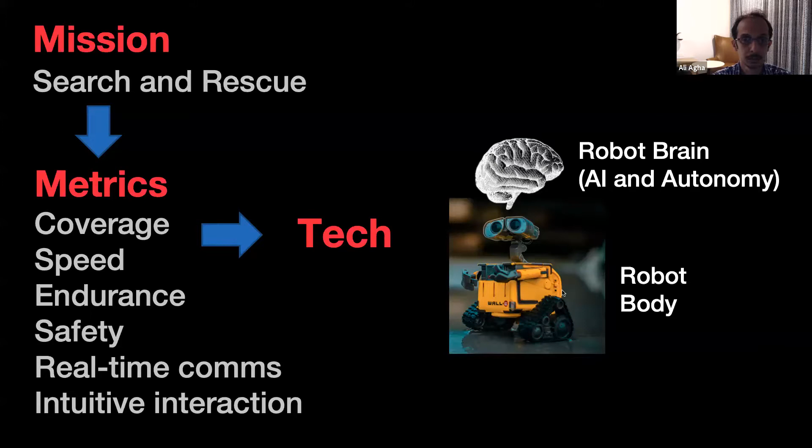In part one, I'll briefly go over one example mission as context for the technologies I'm going to talk about. And in part two, I'll touch very briefly on some pillars and components of robotic AI that would be most related to search and rescue missions.

As a reference mission, I'm focusing on the DARPA Subterranean Challenge, a huge project and effort started in the US 4 years ago with participants from all over the world. The goal of this robotic event, held as a competition, is to autonomously explore unknown environments, as the ones you can see here—pretty challenging environments like man-made mines and tunnels after disasters, abandoned urban structures that we need to search and explore and gather information from, natural caves, and environments that combine all these features together.

A feature of these environments is that they're GPS denied, communication is really difficult, and mobility-wise it's difficult to explore them. But even further, operationally they introduce more challenges. We need to cover multiple kilometers in only 1 hour with no prior map of the environment, and with no human allowed to enter the course in this competition. There's only one single external supervisor who can see the data coming from robots, if any data comes through when communication is established.

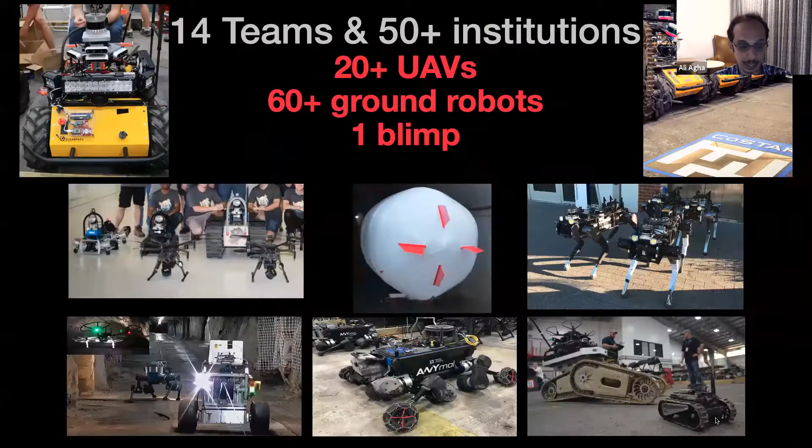There have been more than 50 institutions participating in this effort over the last 4 years. This has been a really amazing push for technology towards search and rescue. Of course, the effort is still simpler than a real world disaster robotics scenario, but it's a first step, a great step towards that.

There have been more than 20 different UAVs deployed in this effort so far, more than 60 different ground robots - legged, wheeled, tracked, and so on - and even one blimp has been deployed. This gives really a plethora of technologies to study and see what works, what doesn't work, and how we can combine these to push the envelope forward.

Our team is called CoStar, a collaboration between NASA's JPL, Caltech, MIT, KAIST, Lulea, as well as a lot of industry partners. We have been able to do well in the last competition and won the latest competition so far, which was in urban search and rescue back in February 2020.

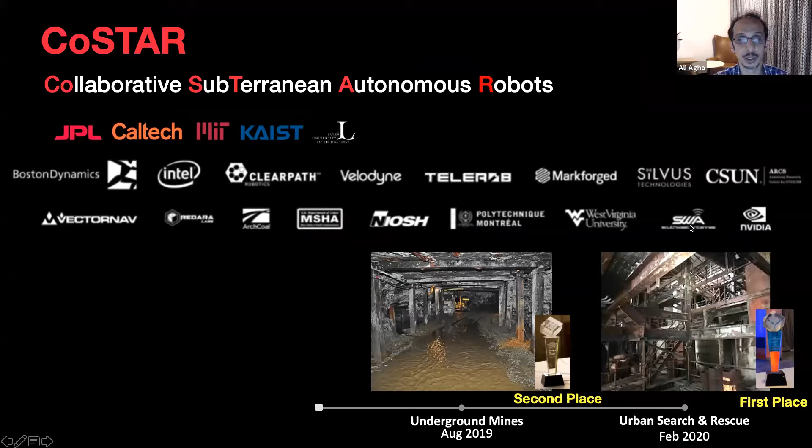Our concept of operation relies on multiple robots with heterogeneous capabilities. So we have legged robots, wheeled drones, tracked robots, where each one is dispatched to part of the environment autonomously. They try to understand what is needed locomotion-wise, AI-wise, and dispatch themselves to be able to explore and maximize the coverage in the limited amount of time that we have.

You see pictures of some of the robots we have deployed. As I mentioned, these complementary capabilities get dispatched to different parts of the course, closer to the base station where the robots are being launched. We try to drop communication nodes like breadcrumbs to create a wireless mesh network to maximize the bandwidth and the ability to talk to the surface.

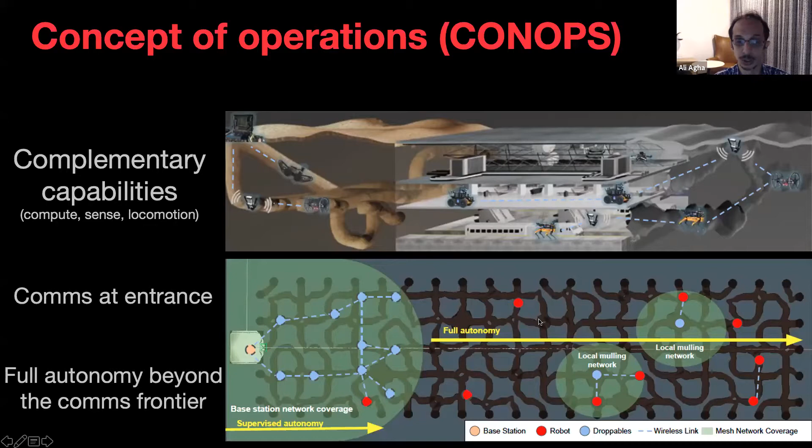But after a while, as you see here beyond the shaded green, the robots are fully autonomous on their own, exploring the environment and coming back to the surface to return the data they're gathering.

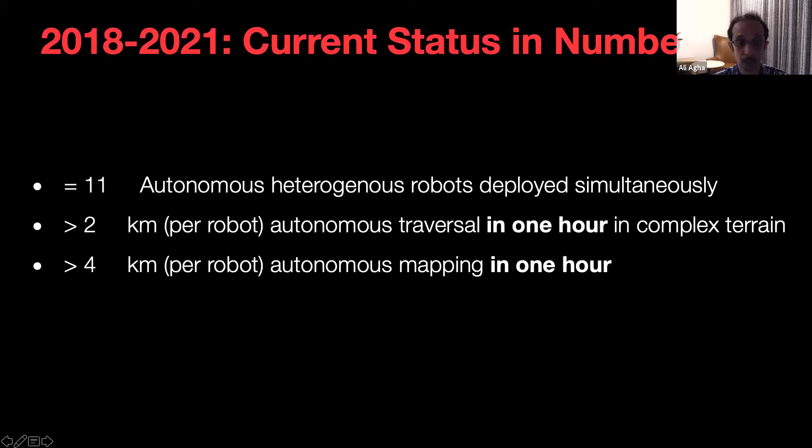Just in terms of numbers, to give you a sense of the progress of our team, we started back in 2018 with 1 or 2 robots, a very minimal exploration capability of 200 to 300 meters. But over the course of 2-3 years, in our latest operations we have been able to deploy 11 heterogeneous robots simultaneously, autonomously exploring the environment. Per robot, the system is able to explore more than 2 kilometers in 1 hour over complex terrains and map more than 4 kilometers.

So I did talk a little bit about the mission. In the next few minutes, I will touch very briefly on some of the technologies that are basically the pillars under these behaviors I talked about. If there's interest, please reach out to me offline and we can go deeper into these technologies, because there's not enough time at this point to cover those. But I'll go over each one briefly, touching on each for 30 seconds or so.

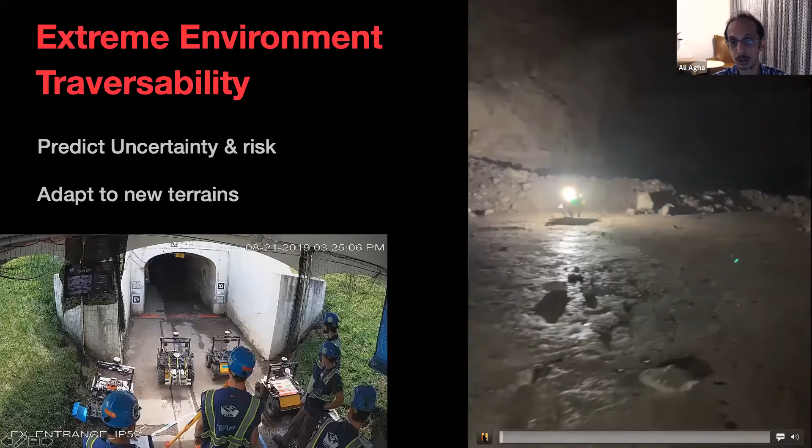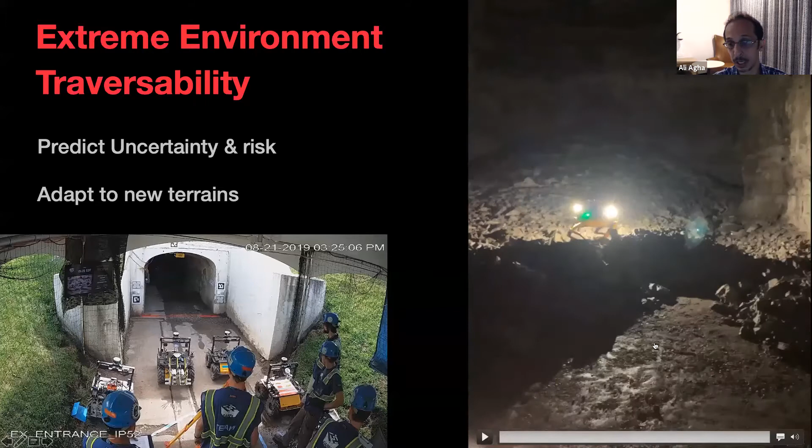The first technology I want to touch on is traversability. We have been working a lot on traversability efforts. Here on the right, you see a mine where we have a collapsed part, and the robot goes and starts basically evaluating what trajectories it can take to explore this part and search for signs of survivors, like CO gas, or thermal, and so on, under the rocks. This has been a big part of our efforts to evaluate where it's traversable, where it's not, and make sure the robot can handle these sorts of environments in this level of extreme cases.

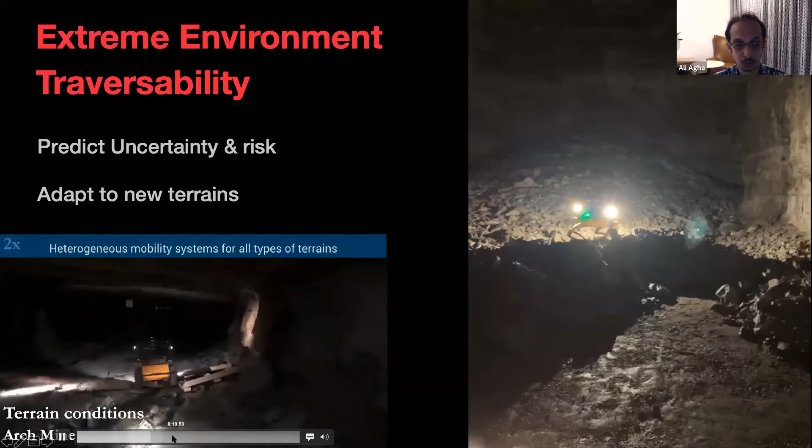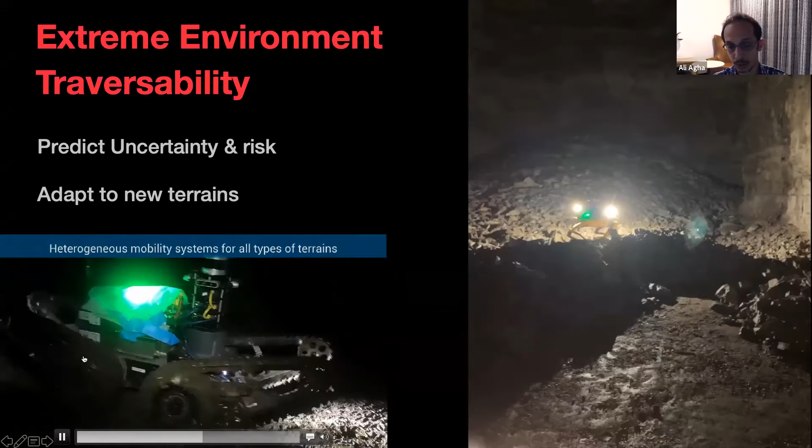On the right, you see a similar effort on the ground robot, wheeled robots, 900 feet underground in a coal mine, where the robot is trying to explore really extreme environments. When a wheeled robot is not able to do so, as you see, it stops here. It autonomously dispatches the tracked robot to traverse certain parts of the course, or if there are elements that need a legged platform, the system sends a legged platform to explore those.

The second technology is navigation, where we are trying to handle GPS-denied, variable lighting, dust, fog, and smoke.

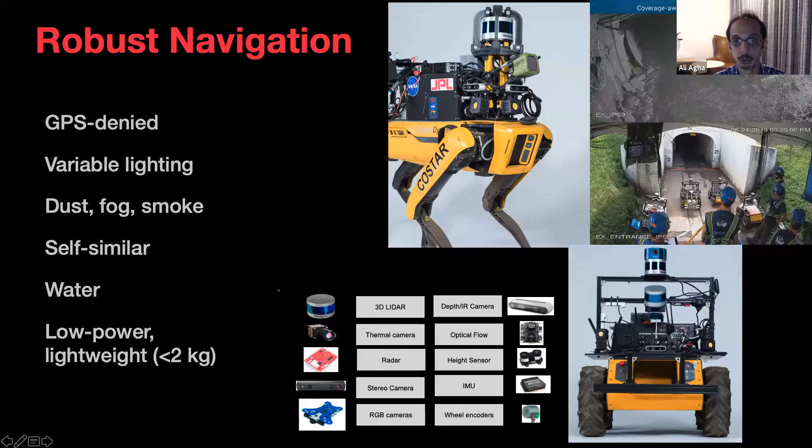As you see, we have a lot of different sensors that we combine to handle different parts of the course. I'll move on. The next technology is on mapping, where we are trying to create large maps to pinpoint the findings in the environment and inform the operators where the events are happening.

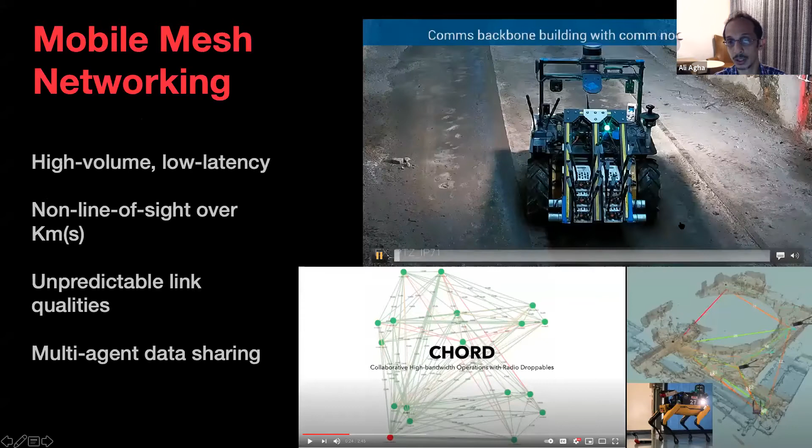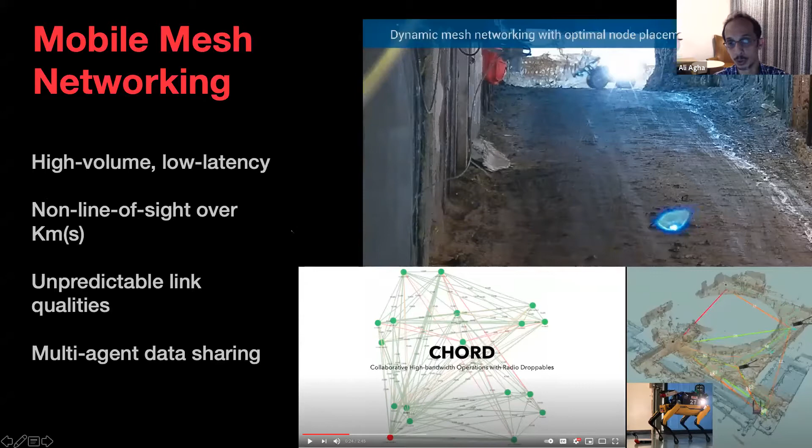Communication between robots is a key aspect to send the data. As you see here, we are showing how we drop communication nodes in the environment to create the wireless mesh network, and sometimes robots act as mobile nodes so we could act like repeaters, still being able to talk to the robots that are deeper in the environment with maximum bandwidth possible.

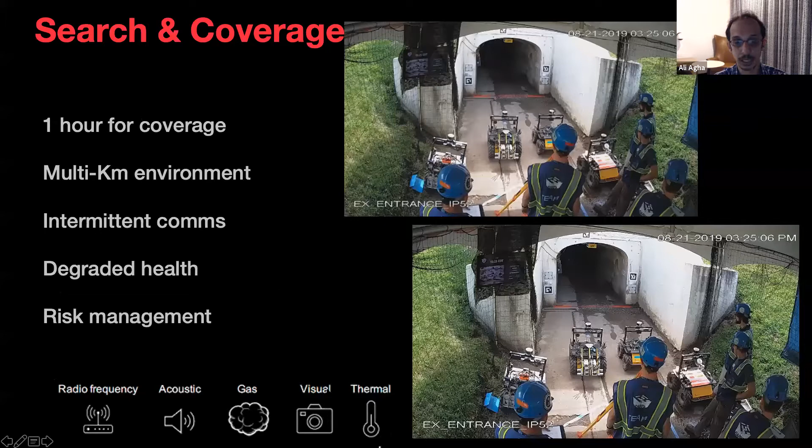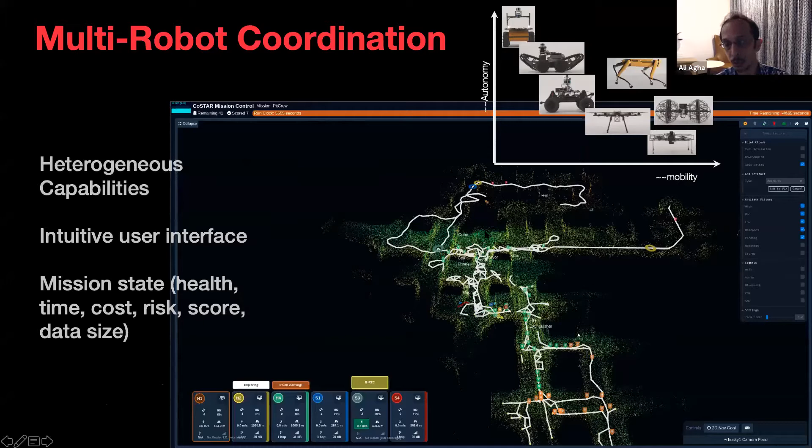Coverage, of course, is an important part where we search for the artifacts I talked about on the bottom left. So I'll skip this slide and move on to the intuitive user interface, where we check the health of the system, and the operation team is able to see where each robot is, what the health is, and how the mission is progressing at the moment.

So with that, this is a very brief touch on this particular mission, which is a step again towards pushing the technologies on search and rescue forward.

And with that, I'll briefly conclude and summarize the main points of the talk. One is that when we analyze robotics-related technologies for search and rescue, it's important to look at robot brain and robot body in harmony and together, to understand what the state of practice and state of the art is.

Assisted AI and autonomy can help a lot. For each given robot body, having better AI and autonomy will open a lot of opportunities on how we use these systems. New investments, recent investments from different sectors, commercial and government, have been pushing the envelope on this front and are a step towards increasing trust in putting these technologies forward.

And finally, under the hood of all we do, really the main element is the fact that we are trying to predict uncertainty and quantify the risk to be able to increase the trust in the system to be able to reliably deploy it. With that...

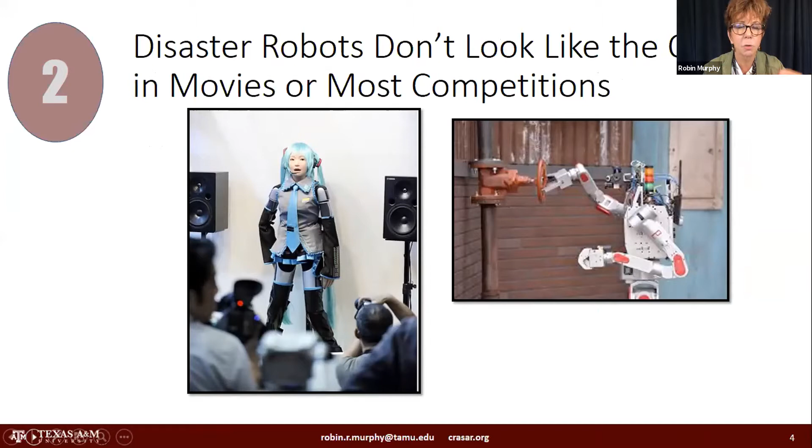Robots can be ground, aerial, or marine systems. The ground robots used today are typically very small. You see that snake robot used at the Mexico City earthquake, and an Inuktun, that category of small robot about the size of a shoebox, typically used at building collapses, from World Trade Center to the Surfside building collapse.

Likewise, these small, inexpensive aerial systems fit in backpacks and are easy to carry. And the same thing we see with the underwater and marine surface vehicles, robot boats. You see ROVs and kayak-based boats.

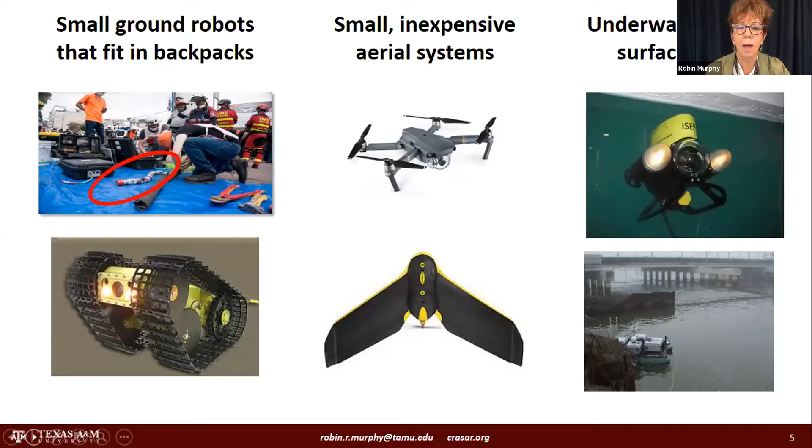The third thing I would like for you to remember is that robots have already been used for almost every disaster and every mission objective. A big thing about what we have found in our studies of innovation is that it's a demand pull, not an innovation push. The responders know what they need, and so it's a matter of getting it to them.

If you look, we've seen robots used extensively for the world's number one disaster, which is flooding. Earthquakes, tsunamis, wildfires, hurricanes, tornadoes, volcanic eruptions, nuclear accidents like Fukushima, major use, marine casualty events such as helping lifeguards with the Syrian refugees coming across to Greece, that's probably one you didn't think of. Building collapses, chemical spills, and pandemics.

Now let's think about that. Pandemics, that sounds weird, right, when we think of disasters, but we're thinking of this all-hazards approach. Emergency managers consider pandemics just one more type of disaster. In the first year, from the very first use of a robot for COVID, we saw 338 instances in 48 countries.

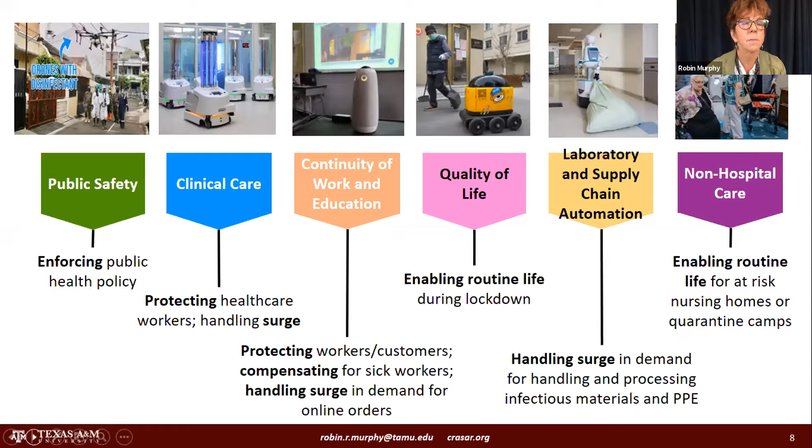So robots have been used for almost everything already, and that's not just for the immediate response, but for all phases. Before an incident happens, for instance like a flood, being able to map your land use, get that digital elevation work, monitor the rising waters of a flood, document your infrastructure, and identify your vulnerable businesses.

During a response, there's tactical, those life-saving operations, where it's literally helping the responders. You're not automating that, you're assisting them to see how to best get a boat in the water to get over to that house, to get that person off of it. Reopening ports and infrastructure was a big problem with the tsunami in Japan, it took out all of their bridges for their trains, and all of the ports, which you'd normally bring supplies in on, like you saw with the Haiti earthquake, you're bringing in the majority of your supplies on ships, but you can't tell if they're fixing to run aground.

Likewise, recovery, being able to get that comprehensive damage assessment, again to monitor what's going on and document those states.

So the fifth lesson, and I think this is really important, is that less developed countries can adopt this. It's not rocket science. Even though we've got brilliant researchers like JPL working on the next area, the majority of robots used in major disasters are $1,000 DJI Mavic Pro series, not the $40,000 ones with LiDAR. They're using structure from motion. Anything you can do with the $40,000 one, you can do with the $1,000 one, and you can carry it in a backpack. If you lose $1,000, that's fine.

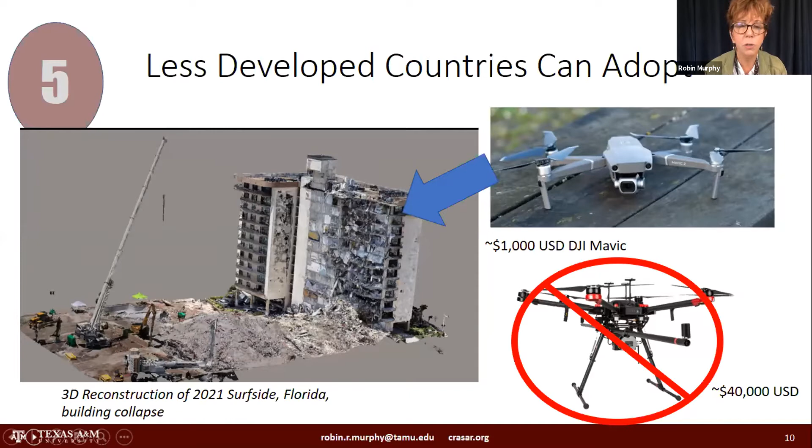So I said I'd like you to remember 5 things, but maybe just remember 2. The first is that robotics are within reach of emergency management agencies in any country. They're not that expensive anymore, and they're not that hard to use. The second is that anything the Center for Robot Assisted Search and Rescue can do to help advise or support a deployment, we do at no cost. We have a large set of best practices and training modules. Whatever we can do to help, there we are.

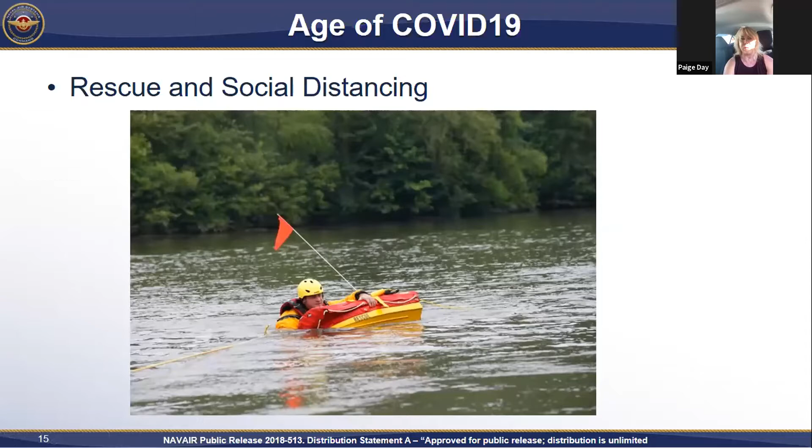It's easily deployable. All of the composites used to make this robot are aircraft-grade fiberglass, epoxy, and Kevlar, so it's very strong, easy to deploy, very lightweight, and battery powered.

This is the Sonar Emily, the next platform that was used. This was actually on a recovery effort I was on up in Arizona. As you can see, the platform is very small. It enables people to go in and see what's going on under the water, whether it's brackish, salt, or fresh. It's very portable, battery powered, and easy to set up. This system was actually used post-disaster from Hurricane Dorian to clear the ports so the big ships could get in with humanitarian aid.

This is the Sonar Emily with post-processing software. It's basically a Humminbird system, which is excellent because first responders get it—it's not complicated, it's easy to use, it has real-time transmission, and it's also easy to post-process for documentation purposes.

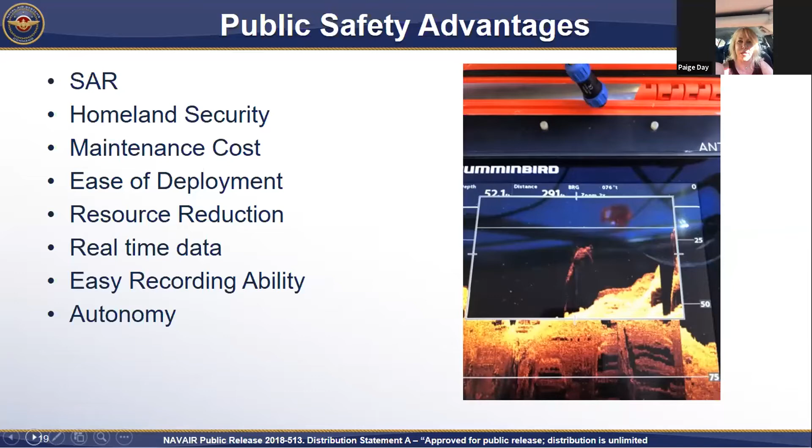This was actually real-time: we were able to identify a target, a missing person who had been missing for 2.5 months, using the sonar technology. With the little Emily, we were able to find him in 2 hours.

This is just how it's run. You can run it with one person, or you can use 2 people to run it.

We talked briefly about the Emily, the original product from Hydronalix. Now we're going to talk about the new technology we're integrating into our platforms.

The first one is the Speedo, a water sampling system. It enables you to go out and get water samples autonomously, drawing the sample and bringing it back for analysis. It gives a real-time stamp and GPS location. This is being used in France right now. They had a big problem with dumping from cruise ships into the water, and scientists were able to use this to qualify their samples and justify that the cruise ships were not doing what they're supposed to. Environmentally, that's very important.

This is again about environmental response. We all know what's going on with our waters. It's important that we identify not only fouled samples, but also determine the best way to clean up our waterways.

This is the newest drone we've come up with. It has a 360 sonar on it, and for post-disaster situations it can go over and get a quick look, jump over dams, fly over waterways, and give real-time sonar data back to the first responder so they can determine what's going on. This will be very beneficial, like what happened in Michigan 2 years ago when all the dams broke. It can give valuable information to engineers so they can determine the best course of action to start reconstruction.

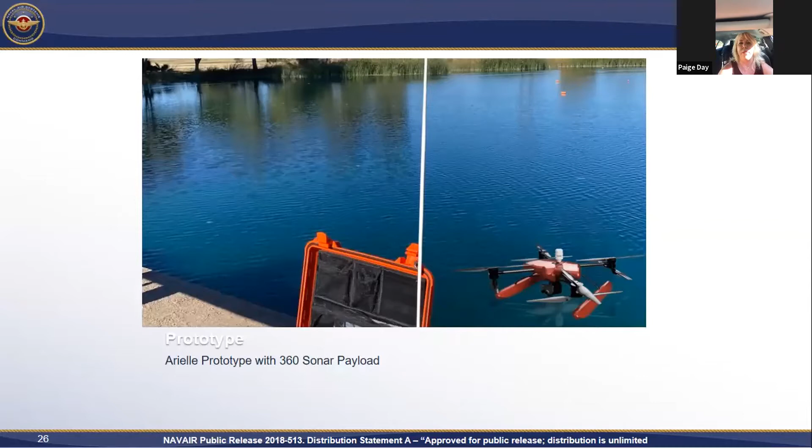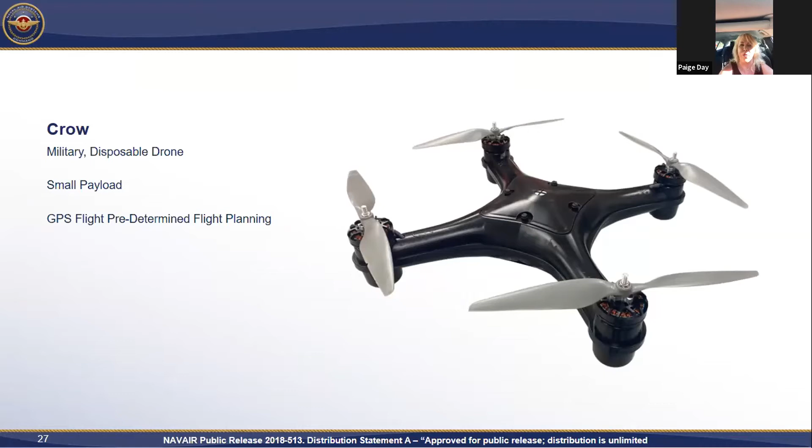Dr. Murphy discussed this as well. These are our new disposable drones. One is called the Crow, for military use. The second is the Dove, which we'll see in the next picture - it's white. They have a very small payload and are designed for just one easy course. The price point is under $1,000. They're considered disposable, super easy to use and deploy. You just use your smartphone or tablet, and you can deliver medication, water, IV bags, anything you need. This could have been super beneficial post-hurricane in Haiti, just to get supplies from point A to a landing zone so people can get the support they need.

So that's the presentation. I apologize for my lack of professionalism, but I was called out to help the Ohio Department of Transportation and the fire department here in Loveland, Ohio. It's great that I could be with you, and I appreciate everyone's time. I look forward to talking to anybody with questions about our amazing robots.

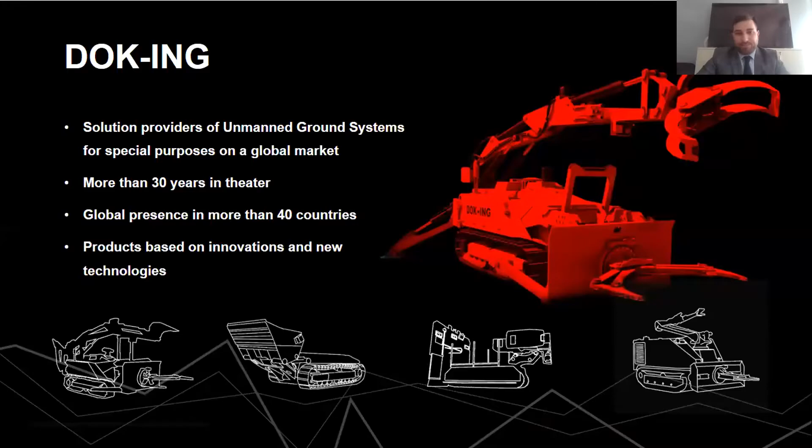We are working in 4 main areas of use: humanitarian demining, and we originated from this field. For the last 30 years we've been providing solutions for humanitarian demining, with our platforms ranging from 2 tons up to 22 tons. We learned a lot about disaster management from this field, because we learned how to deal with extreme environments, extreme dust, extreme particles flying around, flying debris that's usually present during emergency response. From there we moved to the underground mining sector, also represented in the presentation from Dr. Ali. Underground mining is also an extreme environment where you need to find a way to operate with existing comms in a really harsh environment. We used all these experiences to provide solutions for two different programs we entered since 2013.

This is the emergency response. We provide different types of solutions, complete solutions for emergency response that consist of robotic systems, a small one and a big one, an aerial system, and a command and control solution which enables rapid responders to react properly. That gave us important experience to go into another program, which is counterterrorism, which is even more demanding because there are people working around the machinery that could be either unmanned or man-driven.

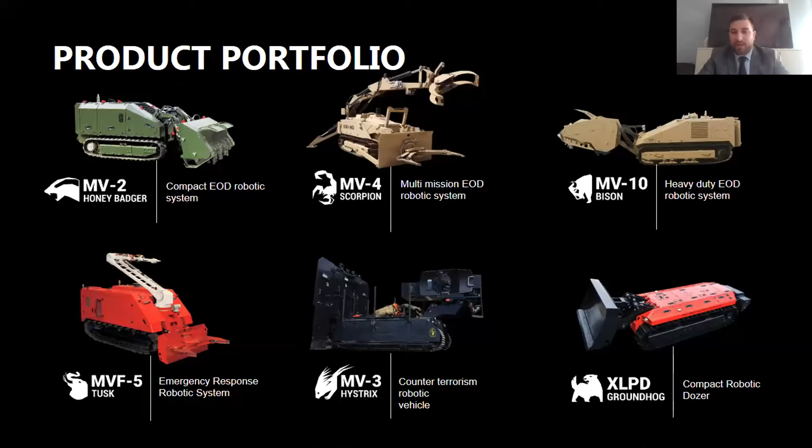As you can see here, this is the entire UGV portfolio that we are providing, different types of products. The top products are for humanitarian demining, while the lower products are either for underground mining or for emergency response.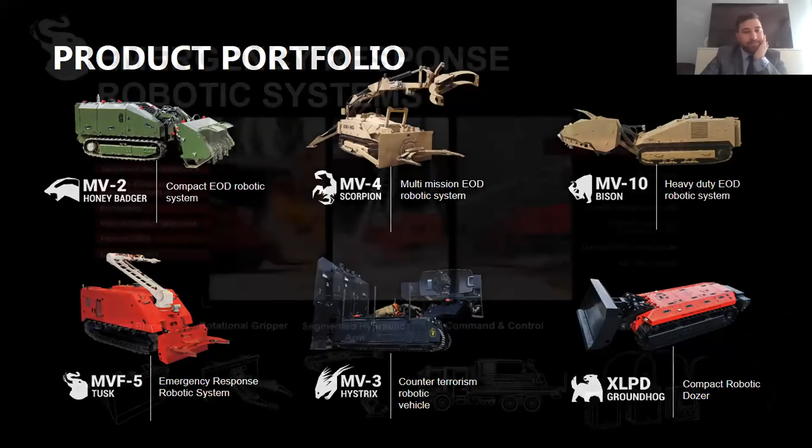Since the topic of this presentation is emergency response, the systems we're providing are bigger in size, because we found out from our end users that they usually demand bigger systems able to have capabilities for survey and reconnaissance, and at the same time obstacle removal on the path of intervention. They were asking for different capabilities, so they're able to provide firefighting or contamination assets, and these systems can be used in rescue operations in terms of punching through walls, supporting search and rescue operations, and moving and manipulating objects.

Equally important is CBRNE and hazmat operations, hazardous material. You are able to provide information to end users such as levels of oxygen, temperature, different types of chemical information, whether there are toxic industrial chemicals around or not, for example. And of course, there's always a problem with logistics, so they need some form of muscle on the ground. The bigger robotics are able to provide that as well.

The applications in which our users were typically using these machines are usually unplanned explosions at munition sites or shooting ranges where they induced fire with live munition and didn't know how to approach the area with conventional means. The same happens with flammable material warehouses, oil refineries, chemical plants and warehouses as well. We learned a lot from the Fukushima event, where they needed a system robust and big enough to clear debris and obstacles so other intervention vehicles could go through.

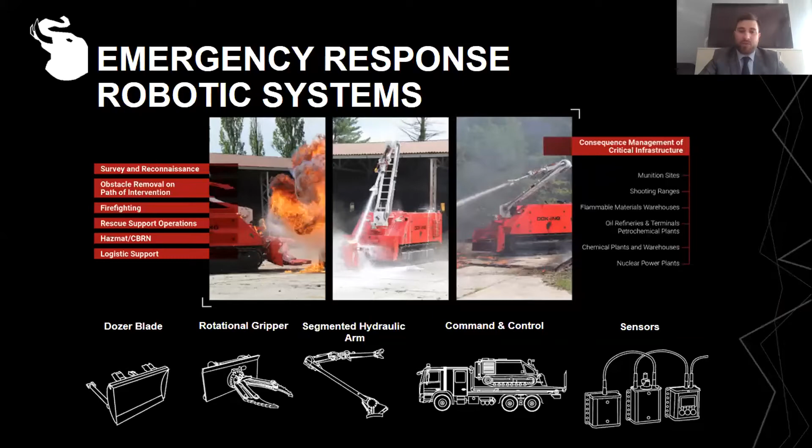This is a short video from a real case operation. This is a landfill fire hazmat operation. They were using the system to extinguish pockets of fire, which at some points were filled with methane, and the toxicity of the environment was significant.

I would like to mention here that, as you can see, there's a lot of smoke, a lot of fire, a lot of particles around the machine. So the sensors required for autonomy here wouldn't work. I think there's a long way to go to have, maybe in this type of environment, artificial functions, let's say autonomous functions. So basically you need to have a reliable comms mesh network, the possibility to operate in this type of environment, and manned supervision over the application of robots.

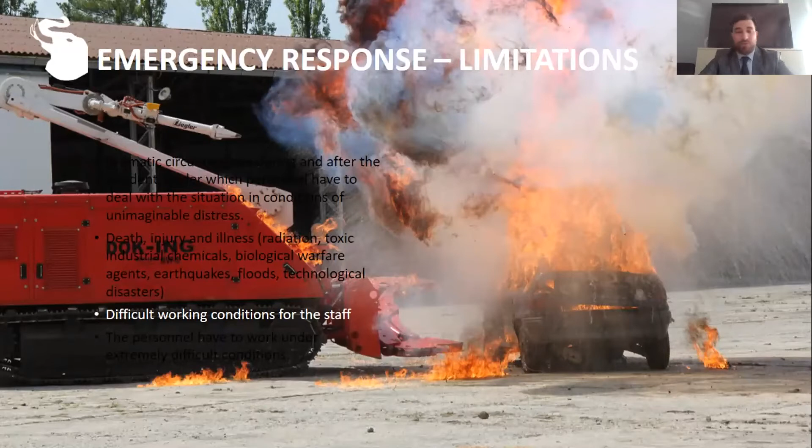The emergency response limitation is that in situations where humans are not able to go, it's much easier to send an asset like a robotic system, since there are no human restrictions on entering dangerous areas like you see in these pictures. You're able to go faster because you can approach the operational area without special preparation, and you can have longer and more durable operations because there's no limitation due to personal protective equipment, for example. It's safer because you're putting humans out of harm's way.

And with this type of system, you are versatile because you have a wide range of cameras, sensors, and detectors, and with fewer errors, people are not exposed to the stress that rapid responders face under immediate threat. And if you have a bigger system, you're able to have modularity, with front and rear tool attachments that can be used for different types of applications.

So basically, the entire approach addresses dirty, dull, and dangerous work. Different types of tasks and missions require an asset that is able to handle different kinds of tasks and missions. For example, reconnaissance and survey tasks, which could be perhaps the most difficult and dangerous part of emergency response. And hazardous material handling is really time-consuming and an efficient destroyer of rapid responders' momentum, because you need to deal with the situation and play with the cards you're handed. So it's really beneficial to have robotics in such environments.

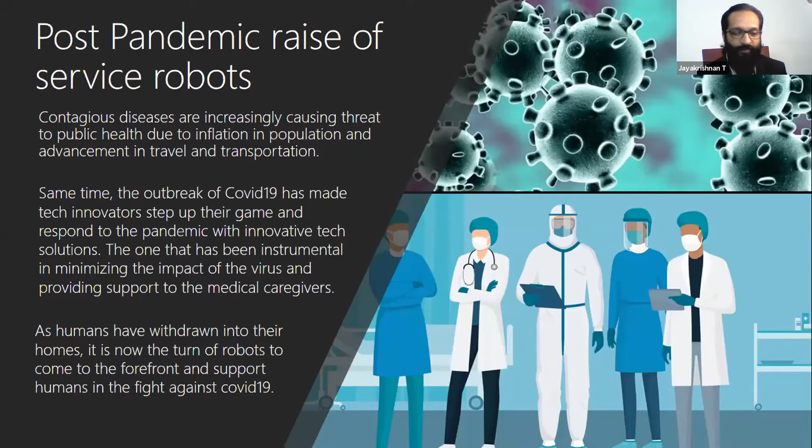Today we'll just go through some of the humble efforts done from the side of Asimov Robotics to manage the pandemic situation.

I'm dealing with three major aspects: social behavior and hygiene, logistics and nursing, and assistive systems and mental health. I won't cover everything today due to the limitation of time. Let's see what all.

It started actually long back. In fact, in March 2020, we were working on another project, related to when the Nipah outbreak was there in 2018 in Kerala. That is the reason we were able to quickly customize the robot for this purpose.

We deployed 2 robots in the working space. One is for educating the people, because they were really panicked during the initial days and had no idea how to protect themselves from getting infected. So we deployed one robot for making them aware of the situation, and the second robot for answering their queries about the pandemic and the precautionary measures.

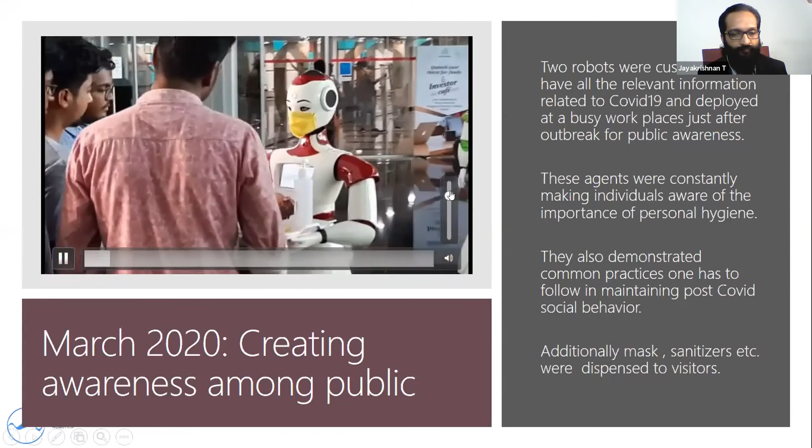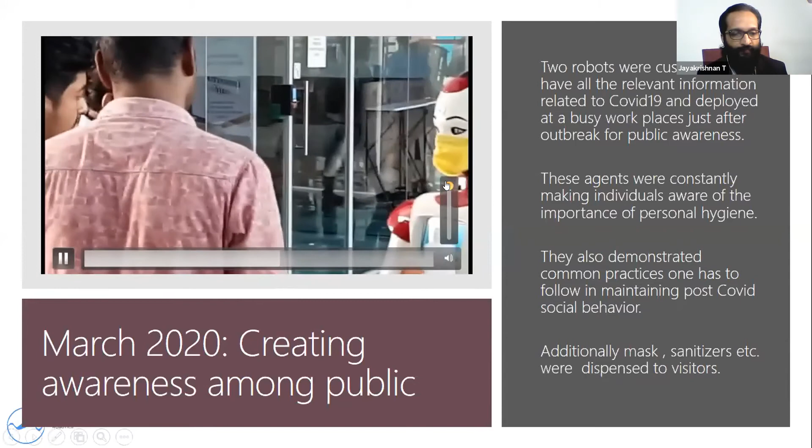Please play the video, you can see that. This is the first robot. It is actually loaded with WHO's information, video clippings, sanitizer dispensing, and mask dispensing.

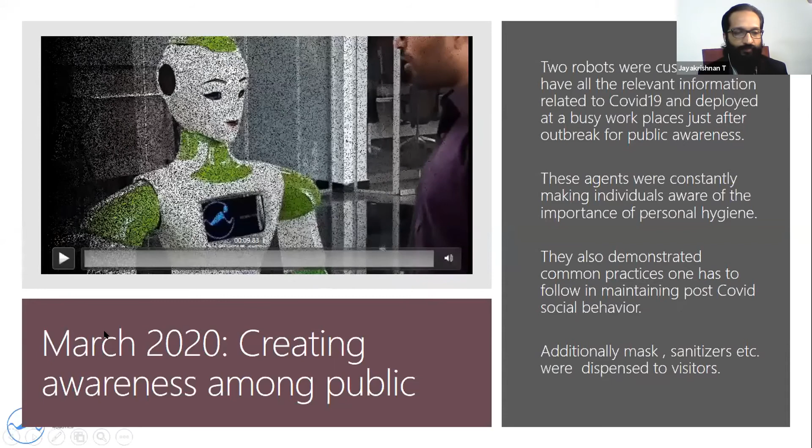And the second robot, well, you can see that in the frame, it's not in this video. It's talking about answering the questions related to the pandemic, like how to protect ourselves from getting infected.

This robot was a comprehensive solution for dispensing food and medicine inside the COVID ward, and also for disinfection of trash — we had to collect trash from the patients too. This was for asymptomatic patients who tested positive, to minimize exposure and use of PPE kits for healthcare workers. This robot was also equipped with telemedicine capabilities, and was able to do targeted disinfection in case of any spillage due to vomiting, coughing, or sneezing.

You can go to the next slide and play the video. The name of the robot is Karmi Bot.

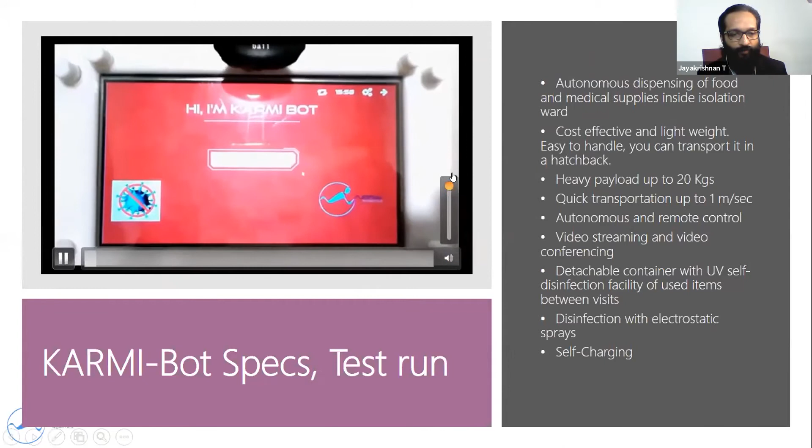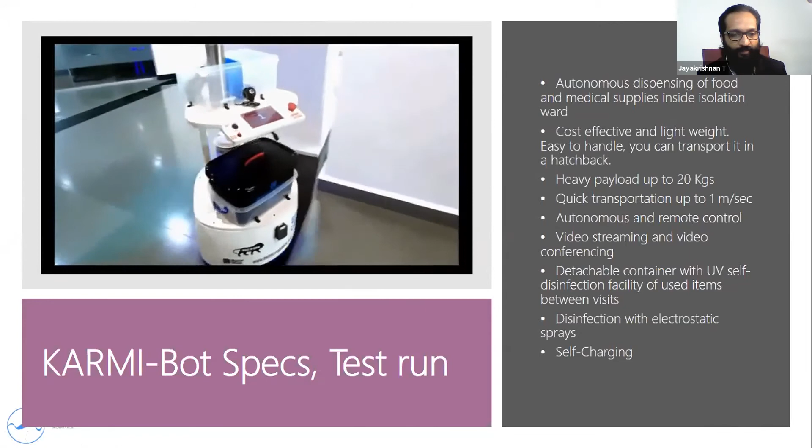Hope the boxes are filled. Press the buttons for selecting rooms. Karmi Bot on duty. You can see what is happening inside through a mobile device. You don't have to control it, everything is autonomous. And in case you want to control it, you can take the control.

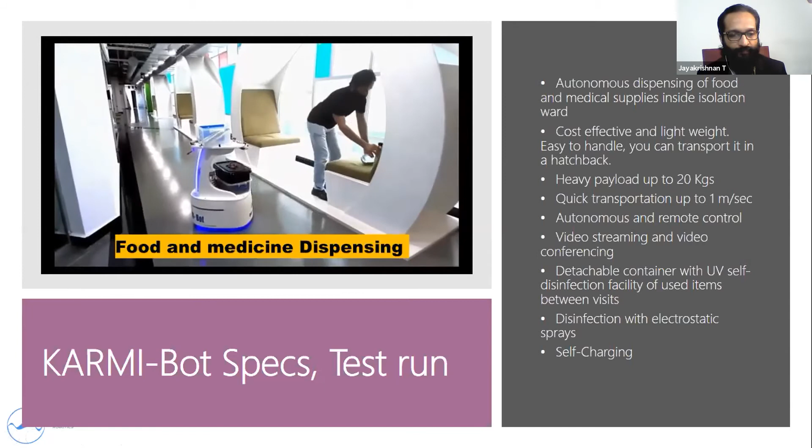We are not able to take videos from the hospital, we are not allowed, doctor. That's why this is a simulated, emulated environment.

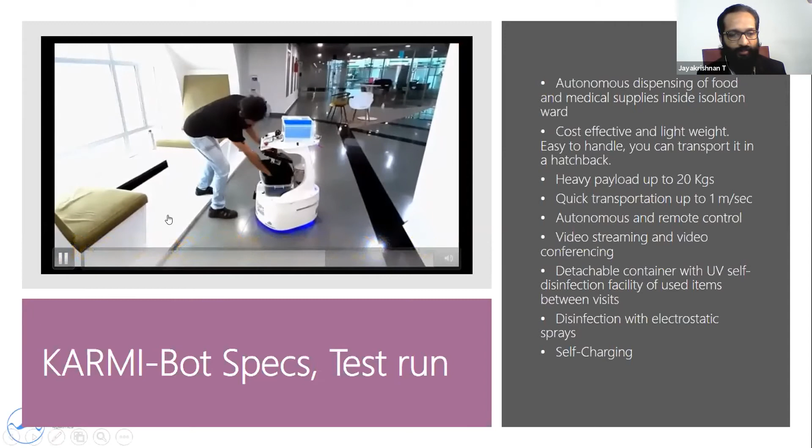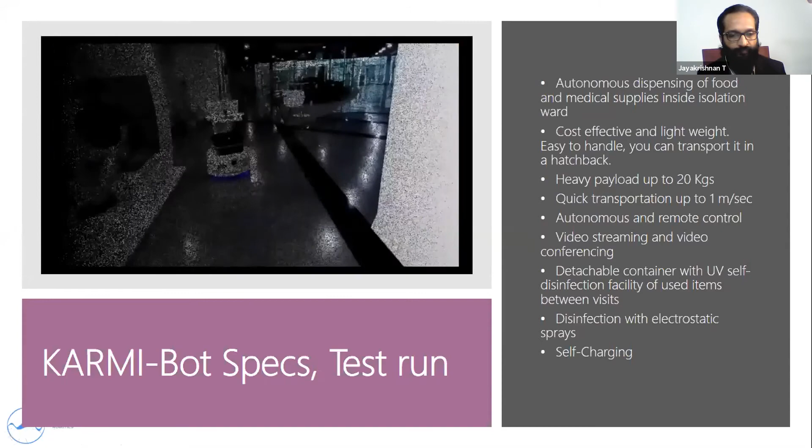It's our office only. On the return journey, you can see a black box wherein the patient can put their trash, which is UV enabled. So when it is closed, the UV disinfection starts. Please don't open the tray. And it goes back to the nursing station.

And this is the targeted disinfection. You can use either sodium hypochlorite diluted or any other disinfectant. You can mark this point on the map, and send the robot inside to do the first level disinfection.

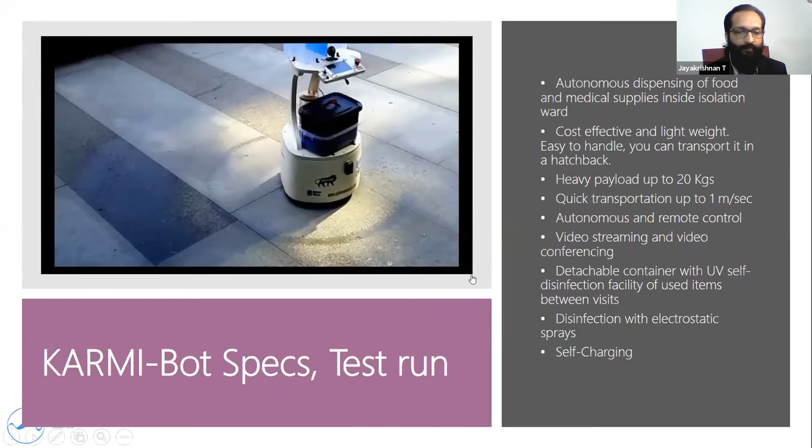By June 2020, we started equipping the robot with COVID screening facilities, where we integrated temperature monitoring, detection of mask, social distancing, sanitizer dispensing for hands, and gadget disinfection using a UV box.

The same robot, by December 2020, was deployed in a polling booth during the local body elections in Kerala. There, the robot screened almost 300 voters in queue from morning to evening, taking hardly 20 seconds to complete the procedures. You can play the video.

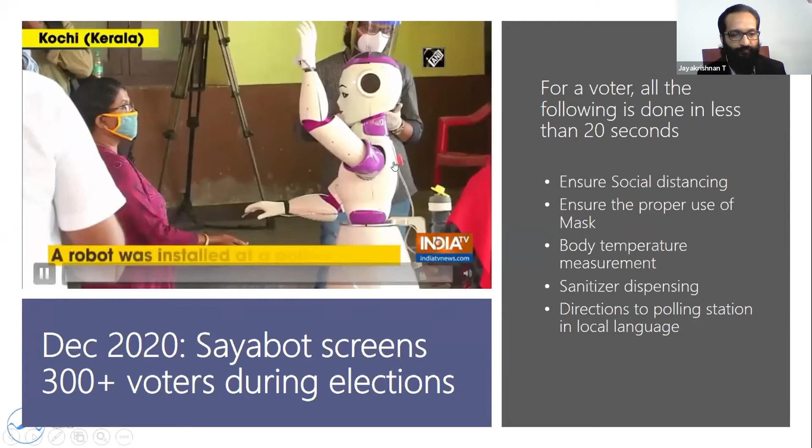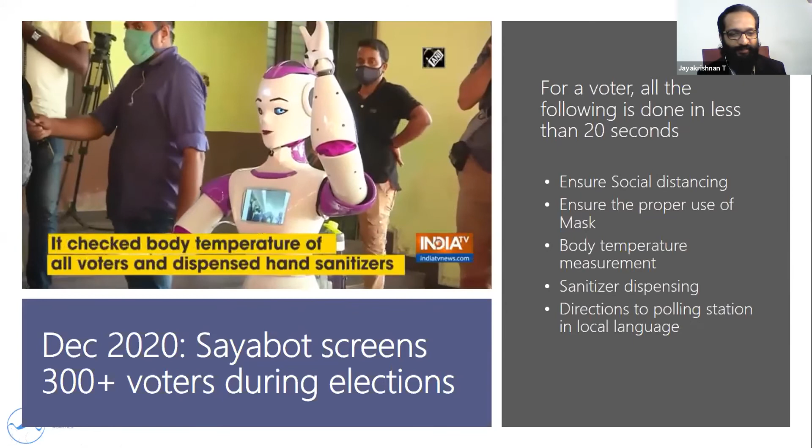Initially, because of seeing the robot for the first time, people were a little bit skeptical, but immediately they were very comfortable operating with the robot and getting screened. The left hand is equipped with the thermal sensor, right hand is with the sanitizer dispenser.

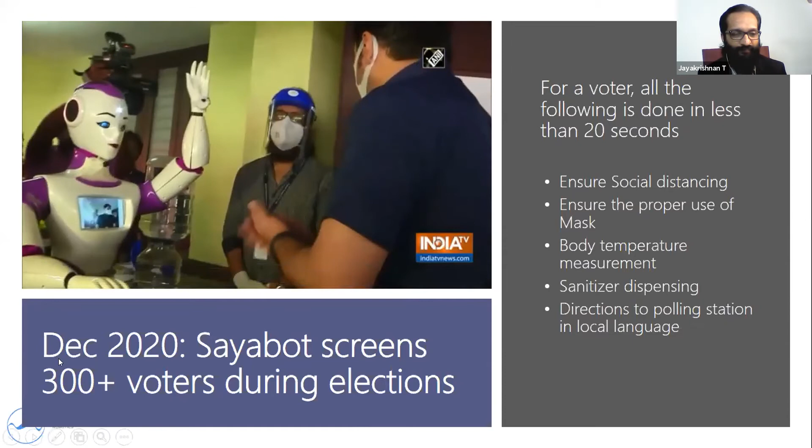Go to the next slide please. This is one of the most important use cases because we are actually working with one of the reputed hospital groups, Narayana Hrudayalaya. This use case was actually introduced to us by Dr. Devi Prasad Shetty. He is the chair of Narayana Hrudayalaya and one of the world-renowned cardiac surgeons, who is also the award winner of the second highest civilian award of India. The hospital is full of ICU wards, with at least 30 to 40 surgeries happening per day, so the immunity level of patients who have undergone surgery is very low.

They have a kind of staff called medical runners, transporting various microbiology samples and clinical consumables back and forth between departments like ICUs, pharmacy, store, and all these places. In order to minimize human presence to safeguard patients from getting infected, we have deployed a set of robots which look like miniaturized ambulances, moving through the corridor with these samples, medicine, and other consumables.

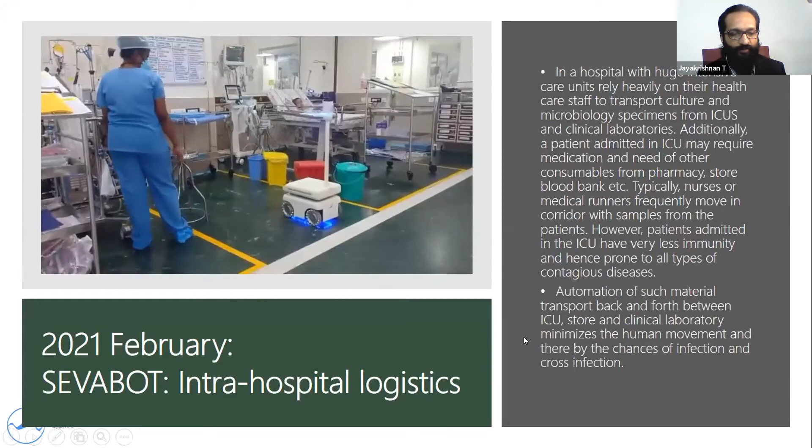You can play the video. I'm going to show you a video actually from the ICU itself. This was a very challenging situation for us because of the highly dynamic nature inside the ICU, with people actually moving back and forth. The robot is taking the sample to the laboratory and comes back with the report.

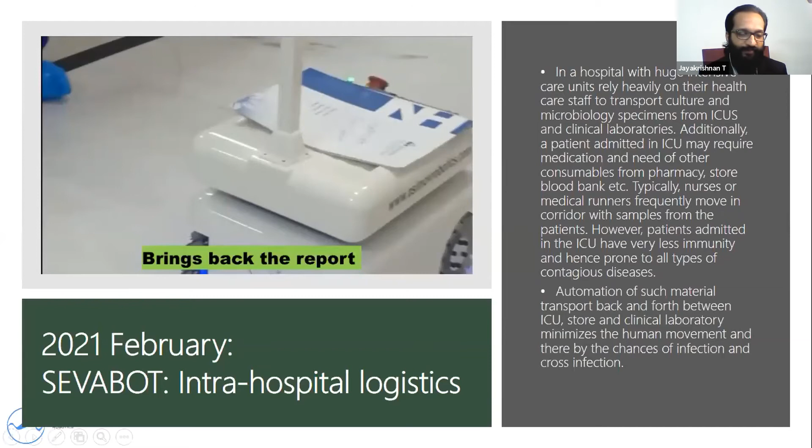We were getting a lot of imaginary obstacles due to the reflection of the metal cladding, so we used sensor fusion using almost 6 or 7 different types of sensors in this case. Please go to the next slide.

Apart from this, we are also working with a surgical robot for a problem called craniosynostosis, and also a compliant platform for laparoscopic neurosurgery to minimize the number of surgeons performing the surgery. That is also very important, but because of time limitation, I cannot show this in this presentation. Thank you very much.